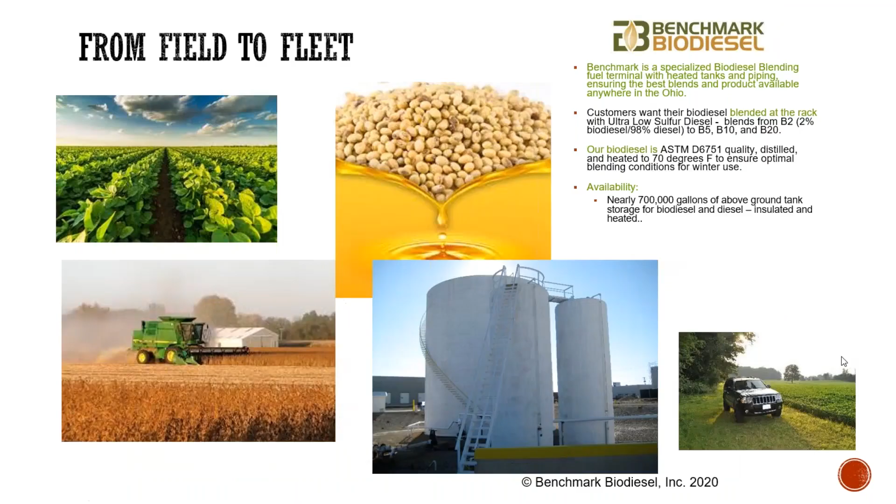So let's go through how biodiesel is made. Biodiesel is made, it has to be heated and it has to be mixed. So you take what's called the feedstock.

In this case, we're going to talk about soybean oil. Soybean oil grown and crushed, you mix it with methanol or ethanol and a catalyst. It has to be heated to a very high temperature, mixed, and then it becomes fuel.

There's been a misconception that maybe you could just use vegetable oil straight. They call it SVO, straight vegetable oil, in a truck and diesel equipment, which isn't advisable in the long run. This makes a really, really nice fuel.

Next, they water wash the fuel to get rid of the excess methanol, so that all the engine problems are eliminated. Our biodiesel, you can see the photo kind of in the middle of the screen there, is distilled.

It's a final step that not everyone takes. It's not an absolute necessity, but we find it is by far the best process for biodiesel in the northern states. Distillation takes all the impurities and all the glycerin.

You can see at the bottom of the beaker there, 10% glycerin. We would like to get all the glycerin out just from the fact that it eliminates any gelling issues that you might have with biodiesel. So we have chosen to use distilled biodiesel.

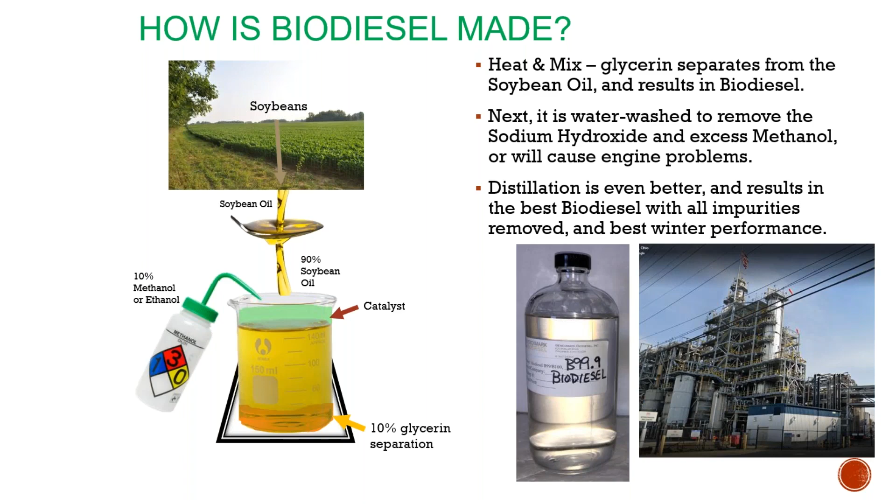We wanted to run through a few misconceptions about biodiesel. Really, the industry got started maybe in the mid 1990s. And so some people had some mixed reviews on the original forms of biodiesel in the late 90s and early 2000s.

So we wanted to go through a few of these misconceptions just to talk about how much things have changed. Just the photo on the right is someone's garage biodiesel maker. And some of these forms of biodiesel were getting out and being used, and they weren't always tremendously successful.

So the number one thing we want to say, I said earlier, it's not raw soybean oil. That's not what you want to use. It needs to be processed and it needs to be washed. Those two things are really important. We like to take the third step and see that it's distilled. So it's not raw vegetable oil.

Sometimes people get ethanol confused with biodiesel. Ethanol goes with gasoline, think of it that way. Ethanol is mixed with gasoline.

It's made from corn. Biodiesel is made from soybean oil or other oils, but it is always mixed with diesel.

So I kind of think of ethanol and biodiesel sort of like cousins. Ethanol is the corn and gasoline side, and we're the soy and diesel side.

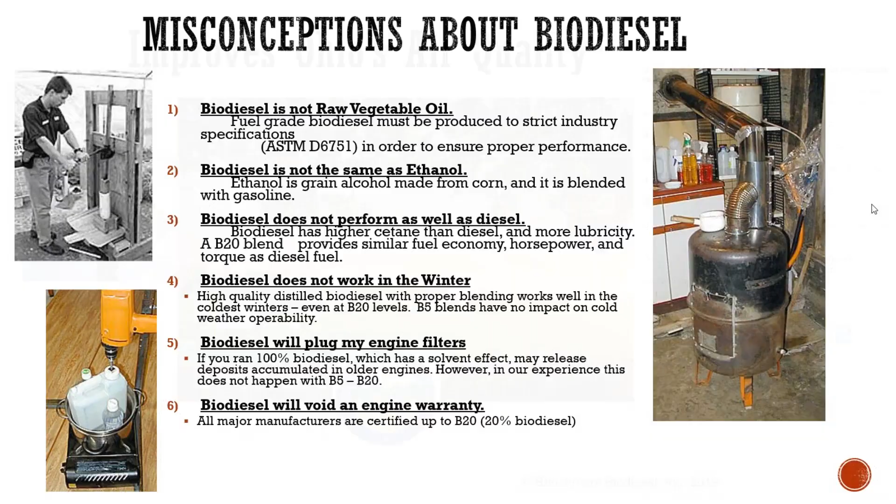So we wanted to talk about what will biodiesel do for your community. Biodiesel is, like we said earlier, a drop-in fuel, which means there's no outlay of money or capital. You don't have to replace equipment. It can run in any diesel right now.

If you're interested to see how much reduction in emissions your fleet could possibly achieve, the EPA has a calculator where you can plug in the number of gallons you use per year or per month, substitute with a biodiesel blend, and see right off the bat what you would save as far as emissions in your community. It reduces your carbon footprint by using 20% less diesel right off the bat, and it runs in any diesel engine - there's no modification, and you will see a little additional lubrication in the engine.

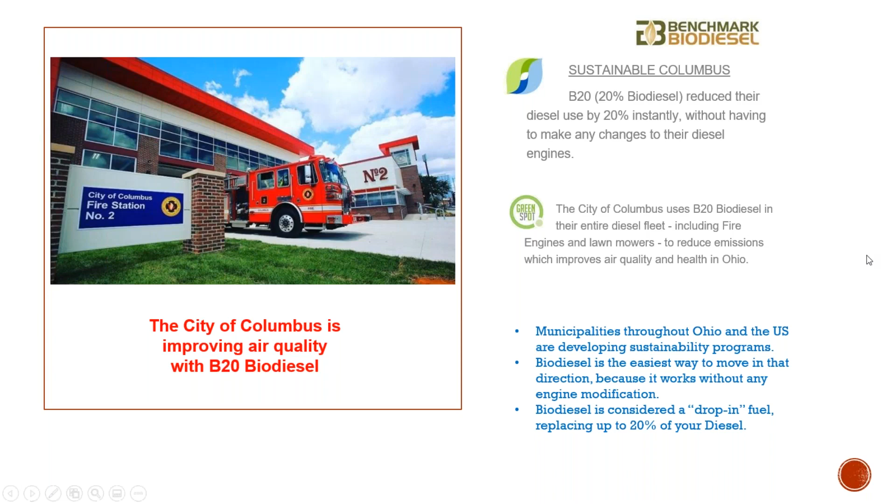So what's the key to biodiesel success? If you want to make a change and switch to biodiesel, we want to make sure there were two things you kept in mind. Because I know not all of you are from Ohio - if you're here, we're happy to help you with anything you might need. But in your area, what would you want to look for?

Number one is quality biodiesel. There has been a huge leap in the availability of quality biodiesel around the country. Use distilled biodiesel if you're in the north - it makes a lot of sense. It works very well, and you're going to eliminate any gelling issues that might concern you. There's something called BQ 9000 - it's a certification for biodiesel that ensures it's of the highest quality. It's a rating; you could look for BQ 9000.

We don't recommend using animal fat biodiesel or yellow grease biodiesel. This is specifically for the northern states - in the south, you may have better success with that than we would here where we have cold weather.

You don't want to end up with something in your tank in September or October, and all of a sudden it's cold and it's not the right feedstock, what we like to call it. So soybean oil—and they make biodiesel out of corn oil now too.

So number two, we would say think about how it's blended. If you use a distributor, make sure to have a discussion with them and make sure they are blending it in a way that makes sense.

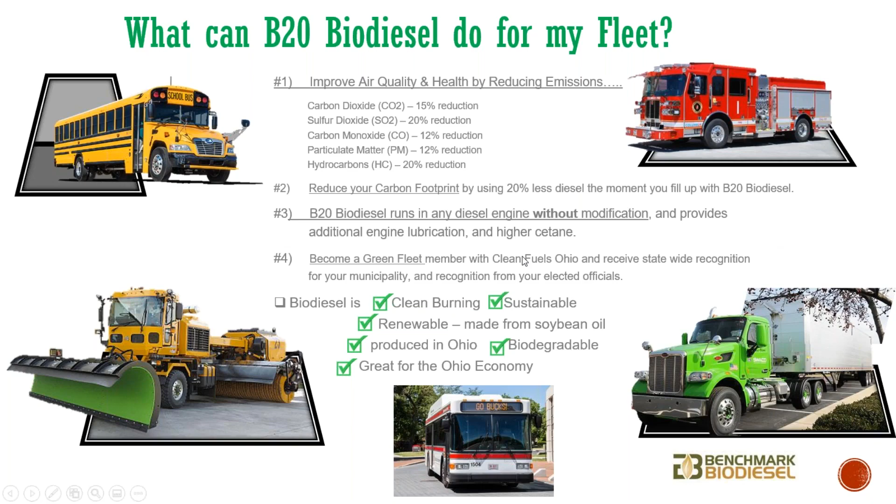So the last question, and most important for many of us, is what's the cost? Biodiesel has cost the same or less than diesel almost always for the last 10 years or so. There was a little blip in 2012 where biodiesel went a bit higher than diesel, but in general we haven't had that issue since, and it's been a really good value for people who want to switch and start reducing emissions for their fleet.

So we deliver directly to customers. I'm sure if you're in another state, they have the same type of delivery available there. If you'd ever need help sourcing biodiesel in another state, get in touch with us—we have a lot of connections through the National Biodiesel Board. We hope you'll consider biodiesel. For the cost, it's really one of the quickest, least expensive, and easiest ways to get started with alternative fuels and reducing emissions.

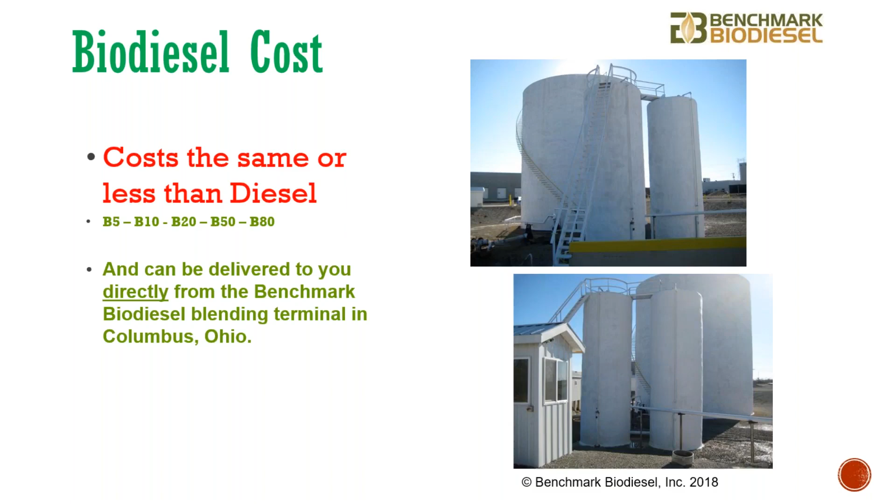Yeah, thank you, Paige, appreciate that presentation. Biodiesel does remain a great drop-in solution, as we call it, because it can drop into your existing fueling infrastructure and your existing vehicles with really no modifications, for a lot of success.

So to talk about that success, we're joined today by Jeff Markusik, who is the fleet superintendent for the Franklin County Engineer's Office. As Paige said, a lot of folks have been using biodiesel around Ohio, and one of the newest members of that community is the Franklin County Engineer. I'd like to turn it over to Jeff now to share his experience from a fleet manager's side in implementing biodiesel through that process. So Jeff, tell us about how biodiesel has been working for the engineer's office.

Okay, thank you, Andrew. Good afternoon, everybody.

Basically, I'm in the same boat as most of you probably on here. We are looking for a way to get greener, but still be fiscally responsible.

I should give you a little timeline. We got a new Franklin County engineer in June 2017, Cornell Robertson, and then I became fleet superintendent in April 2018. One of the first things he tasked me with was to get the fleet greener but also be fiscally responsible. So we started reaching out to different local organizations.

Yeah, the Franklin County Engineer's Office did a really good, conscientious job of this. Bill Burns at SWACO, who used to work for City of Columbus, did some great informational sessions on making sure to get your tanks cleaned and free of water before you switch over to biodiesel. If you've done it recently it's probably fine, but you need to take a look and make sure everything's clean and ready and dry.

There's no water accumulating in your tank, which we occasionally do see and can cause an issue. So if you're going to switch to biodiesel, we do recommend making that the time to go ahead and get things organized and get your tanks cleaned.

My understanding is basically the two big things you're looking out for when doing that are moisture, water content that might have been accumulating in tanks, especially if they're older, and deposits that can be built up from older tanks on diesel use. Biodiesel does have some of those solvency properties, which means it's going to slightly clean the tank. So the tank cleaning eliminates any of that excess moisture, any of that potential buildup, so none of that makes its way into the fuel system of the vehicles. Is that the big bottom line there?

That's right, that's exactly right. The biodiesel will want to absorb some of that water. You just want to make sure all those things are cleaned out and done with before you switch to biodiesel, and then you won't have any issue with any of it. It's good practice anyway, but it's a good time when you switch over, probably a good time just to make sure you're up to speed on that.